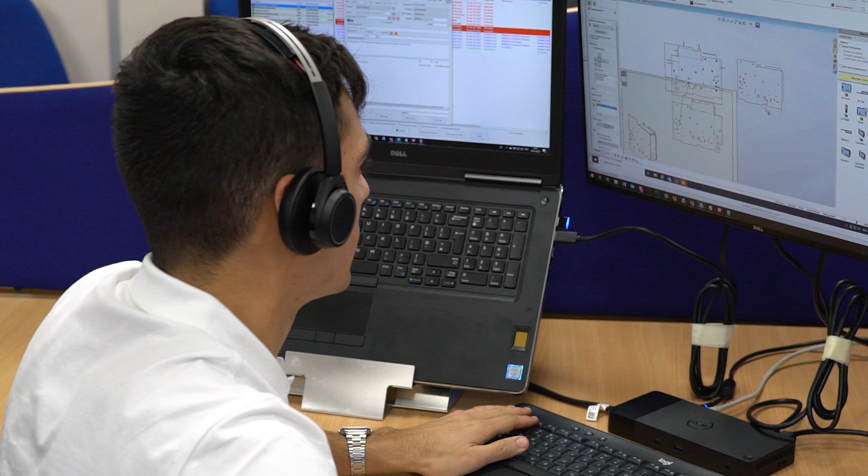SOLIDWORKS Design 2026 brings you enhancements across the portfolio. In this video, we'll focus on the new functionality coming to SOLIDWORKS PDM.

SOLIDWORKS PDM Professional 2026 delivers significant enhancements that streamline collaboration and data management for engineering teams. To showcase these powerful new capabilities, let's follow Eric, Engineer, Megan, Manager, and Mitch, Manufacturing, through a comprehensive workflow that demonstrates key improvements from PDM Professional 2025 Service Pack 1 through 2026.

Enhanced search functionality leads our improvements. The integrated search interface now features a split button design. The first button launches your last executed search, while the second provides access to card search, favorites, and search tools. This streamlined approach reduces clicks and accelerates data retrieval.

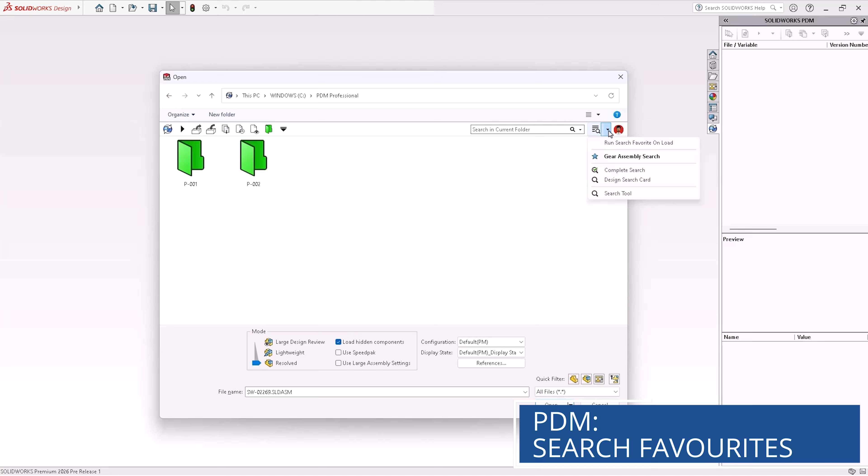Search favorites have been enhanced with greater user control. The new option to clear Run Search Favorite on Load prevents automatic execution when favorite searches are loaded, allowing users to modify parameters before running searches. Eric loads his search criteria without immediate execution, then modifies the parameter before executing the command.

Search capabilities have been expanded for search card controls. Users can now choose between exact value matching and implicit wildcard searches across edit boxes, combo boxes, drop-down lists, and list boxes. Eric demonstrates this by searching for gear and assembly as implicit wildcards, successfully locating assemblies containing these terms rather than requiring exact matches.

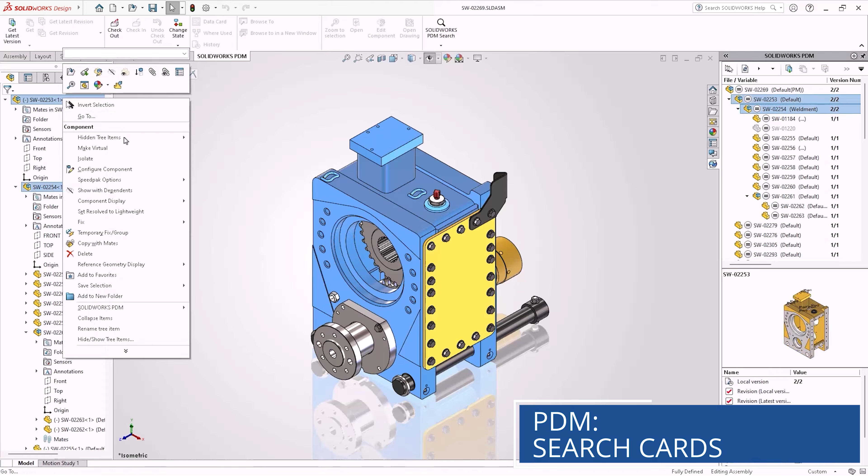Eric checks out the subassembly to implement design changes for the new product launch. The gear assembly requires modification. Specifically, the top wall mounting will be removed as the new design secures the assembly to the chassis through bottom side fastening. After making the required change, Eric saves the assembly locally, but doesn't check in the changes.

To demonstrate a critical workflow scenario, we'll clear the cache to simulate situations where Eric leaves the organisation or a system crash occurs. In these cases, locally saved modifications remain unchecked into SOLIDWORKS PDM, traditionally resulting in data loss. PDM 2026's breakthrough ownership transfer capability addresses this challenge directly. New in 2026, ownership can be transferred even when data hasn't been saved back to PDM.

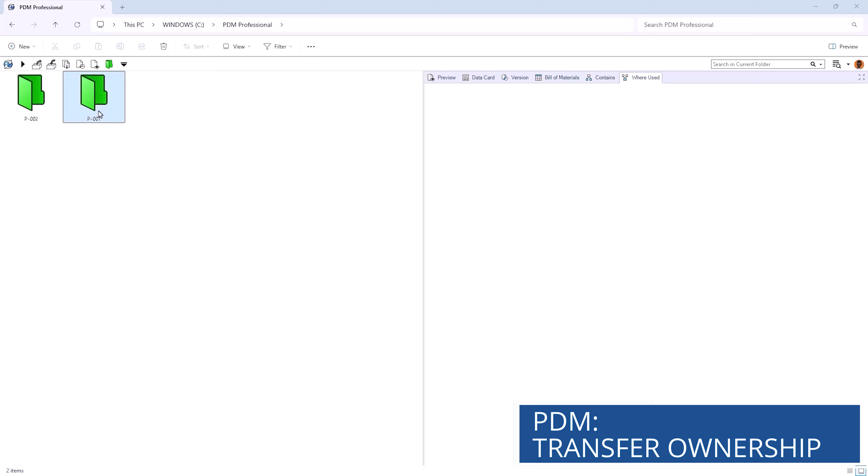Megan Manager can now transfer ownership of Eric's 3 checked out assemblies using the right-click menu. The system's background synchronization between vault views enables the archive server to maintain regular local cache backups, allowing ownership transfer to retrieve backups and apply incremental changes. One of the most significant enhancements in recent releases.

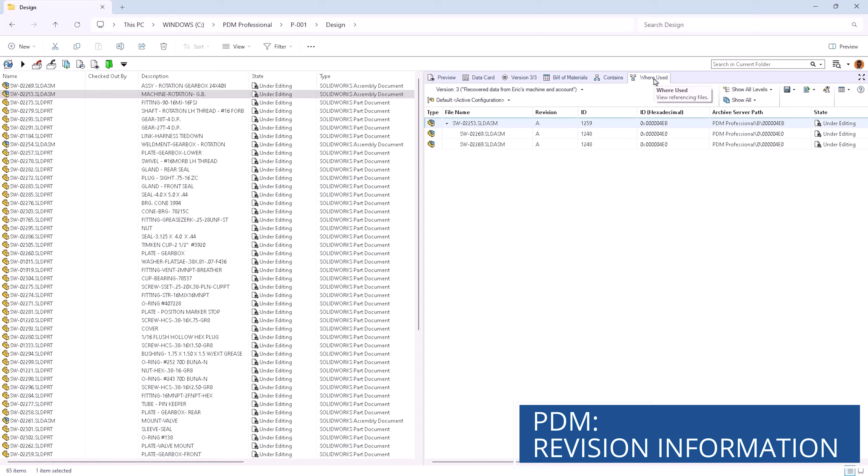File relationship tracking has been improved with system revision variables now available in both Contains and Where Used views, providing Megan with enhanced visibility into component relationships as she moves assemblies through approval and release workflows. System variables of ID, ID hexadecimal, and archive server path are now available in Contains and Where Used views, making it easier for admins to retrieve data in case of an adverse event.

Preview capabilities have expanded to include Parasolid files up to version 37.1 and STEP files in AP203, 214 and 242 formats. Rather than opening files in SOLIDWORKS, users can now preview these formats directly in eDrawings, accelerating review processes.

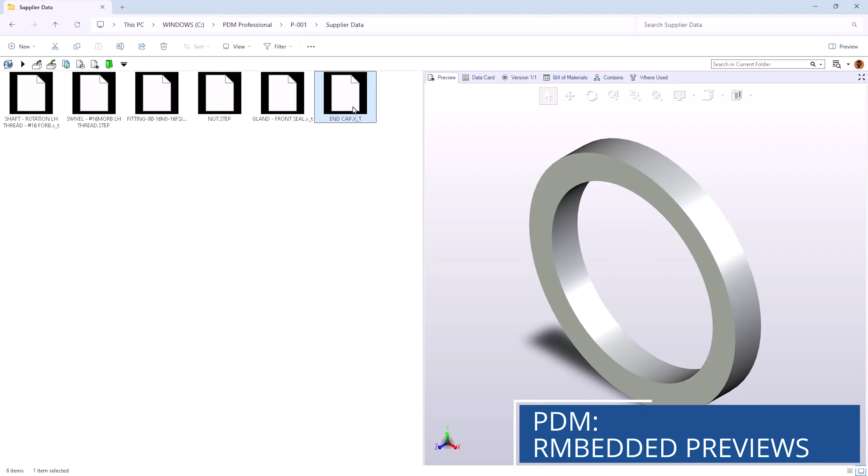Moving forward, Mitch is logging into PDM and to his surprise, he does not have visual navigation to the For Manufacturing folder. With SOLIDWORKS PDM 2026, folder access permissions have been refined for manufacturing workflows. Mitch can now access lower-level folders within restricted hierarchies using 3 specific permissions: may see folders to navigate to subfolder, read file contents, and show working versions of file. This enables targeted access without exposing parent folder contents.

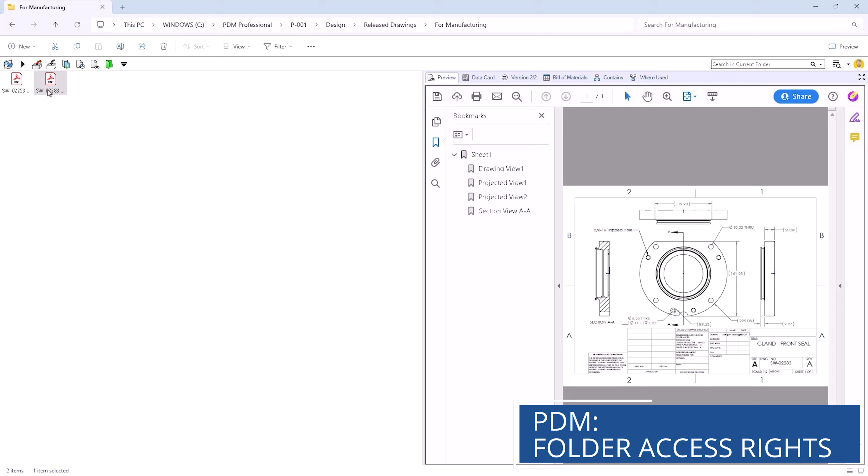Web2 interface improvements enhance user experience with visual refinements. The login process now features a progress indicator, providing clear feedback during authentication. The information panel has been redesigned as collapsible, allowing users to show or hide details based on their workflow needs. Named BOMs are now accessible directly through the Web2 interface. Users can access both manufacturing and purchase BOMs without switching to the desktop client, streamlining review processes for distributed teams.

Administrator capabilities have been significantly expanded through convert task enhancements. SAT output files now support up to version 33, while Parasolid file output extends to version 35.1. New resolution deviation tolerance controls allow precise output file quality management.

IGES conversions offer enhanced control over geometry handling. Administrators can now define solid and surface entities as bonded surfaces, manifold surfaces, or trimmed surfaces, ensuring optimal output for downstream applications. eDrawings conversion has been enhanced with file property preservation options. Users can save file properties individually or for each component in assemblies, maintaining critical metadata throughout the conversion process.

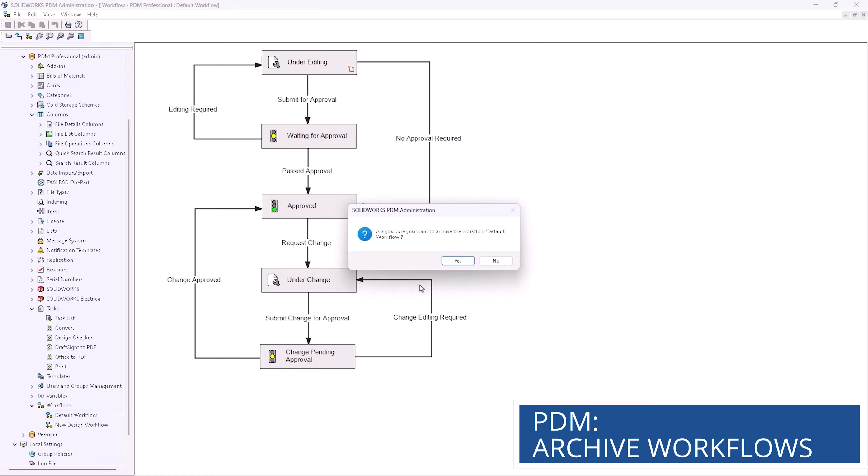Workflow management introduces archive and unarchive capabilities. Administrators can archive existing workflows intended for future retirement while maintaining the ability to restore them when needed. Additionally, file path type conditions are now available by default when creating workflow conditions, simplifying setup processes.

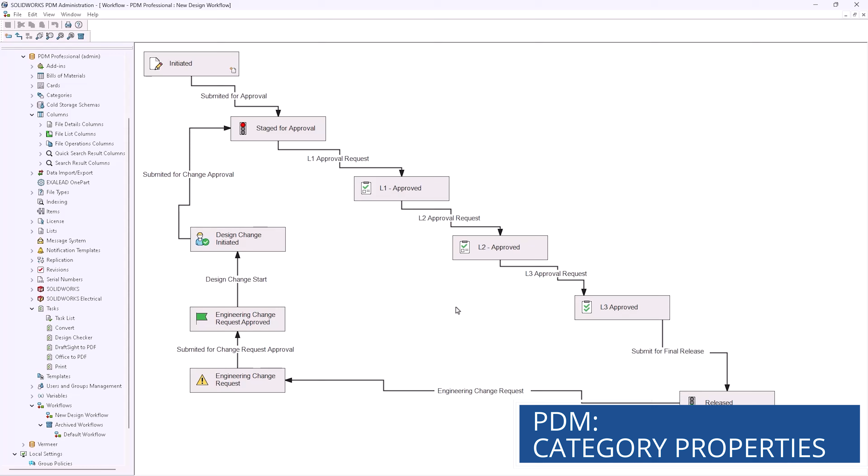With comprehensive enhancements spanning search functionality, ownership management, Web2 interface improvements, administrative controls and workflow management, SOLIDWORKS PDM Professional 2026 delivers the advanced data management platform that modern engineering organizations require for efficient collaboration and project success.